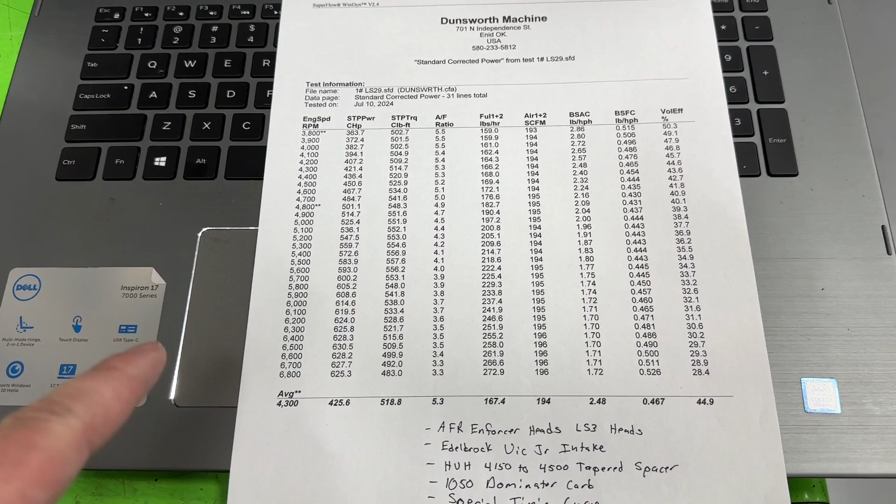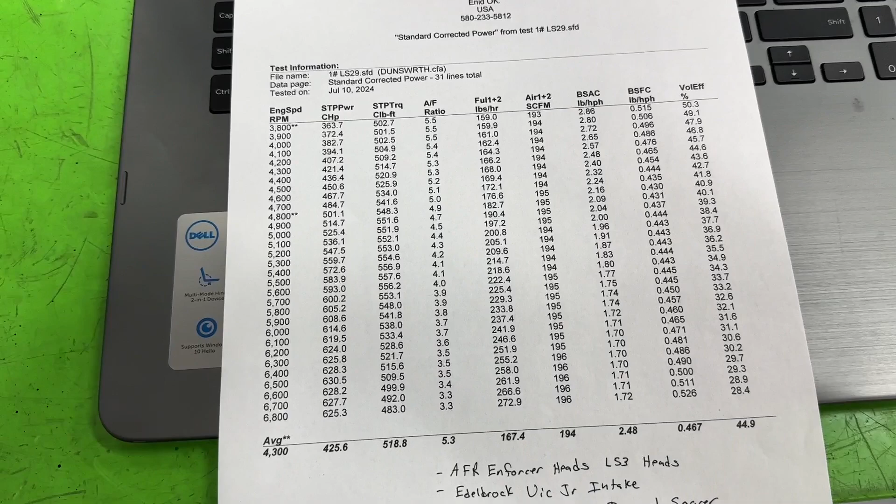All right, this is a dyno sheet from the LS engine, the dyno mule that just got done. And if you watched the previous video, it only made 570, so you might be saying, how in the world did you get to 627, right? What did you do to get there? Well, we'll talk about that later, what was changed on it. But this is still with the Enforcer head, so watch a future video and you can see how that power changed and what we did. But I only need these numbers really, and it kind of helps me out.

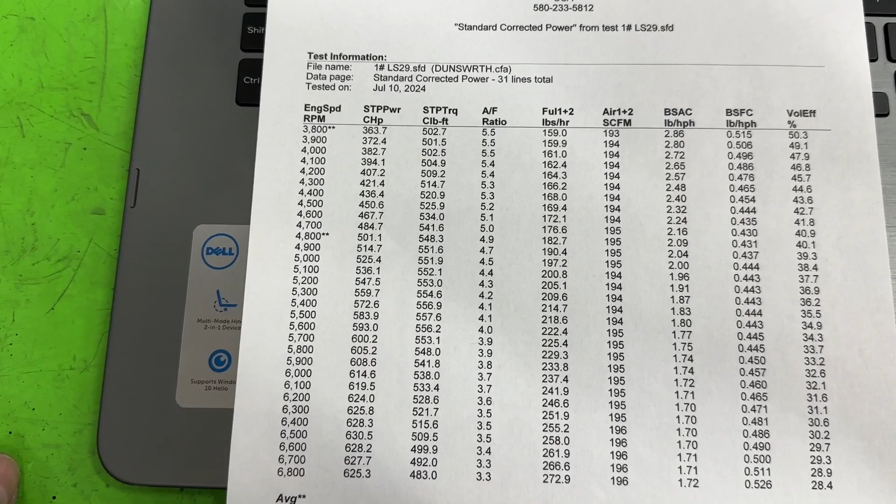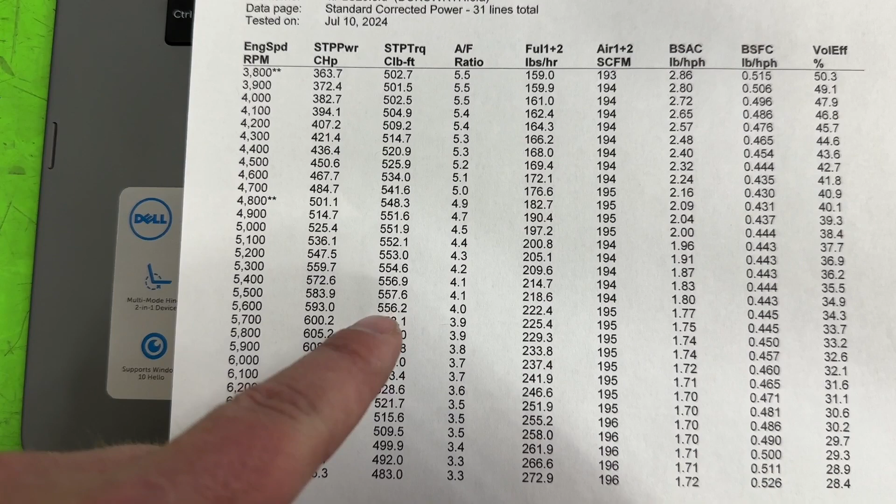So here's what I mean. When I'm looking on this sheet right here, what I'm trying to look at is where does peak torque occur? So forgetting the horsepower for right now, where's peak torque occurring? And if we look at my sheet here, this makes 557.6 foot-pounds of torque, and it's doing it at 5,500 RPM. So that's where it's most efficient, is at 5,500 RPM.

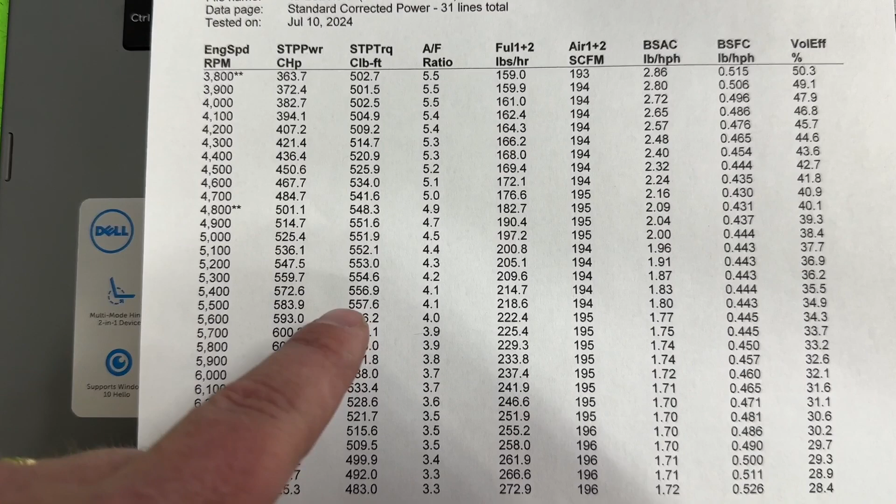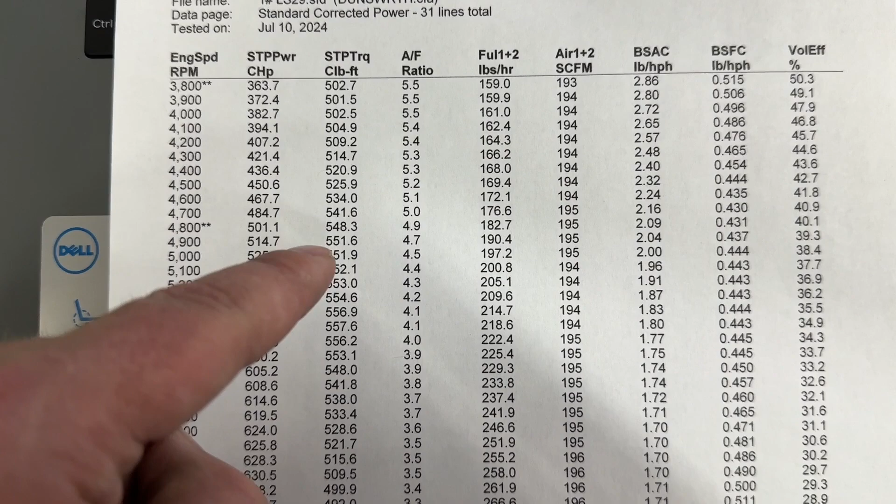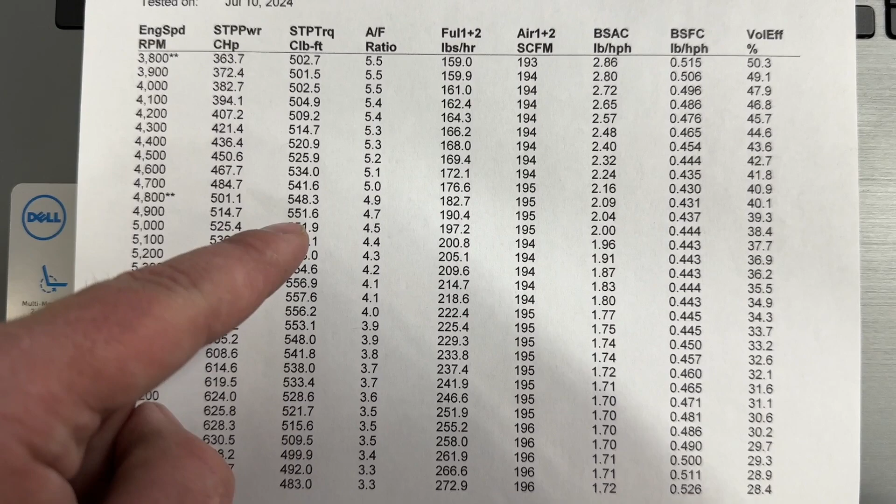But if you look, it's really efficient also at 54 because it's only 1 foot-pound down, and 52, 51, 52. So really, it doesn't really drop from 57 to 548 till there. So really, I'd say from 49 to about 57, it's really in its efficiency range. If I had the air head on here, you could see where the volumetric efficiency would show it too. It would show it's very efficient between, like I said, 4,900 and 5,700 RPM.

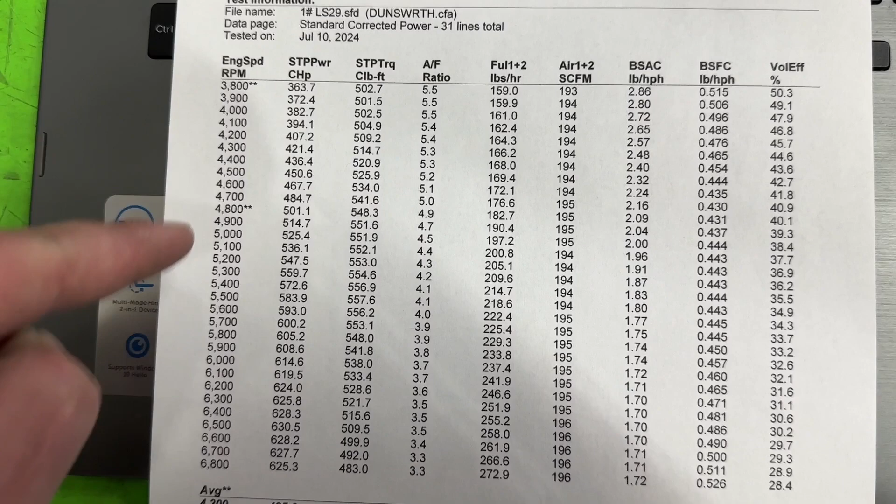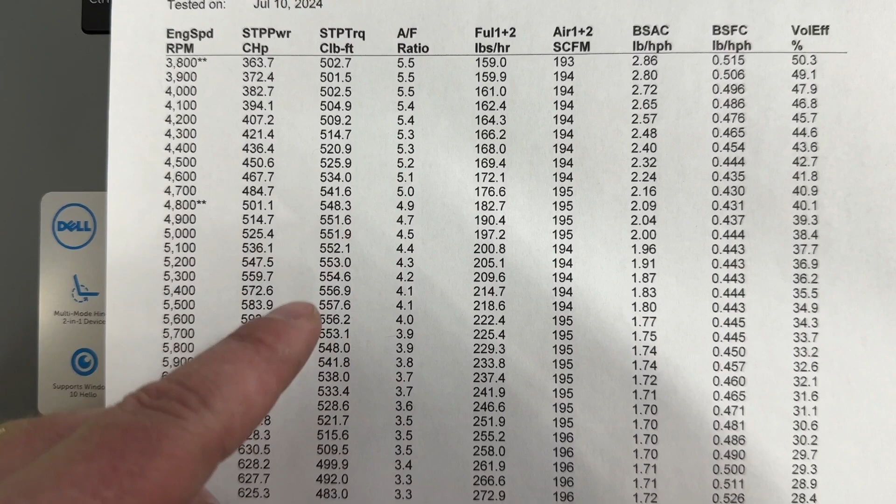So you're like, what do you mean? If you remember this pull right here that you're seeing, it had 29 degrees of timing through the entire curve. So when I started at 3,800, all the way to 6,800 RPM, 29 degrees. Here's what I did, and here's your trick. From this torque point here, so at 4,900 RPM, all the way to 5,700 RPM, I removed timing. I didn't add timing, I removed it.

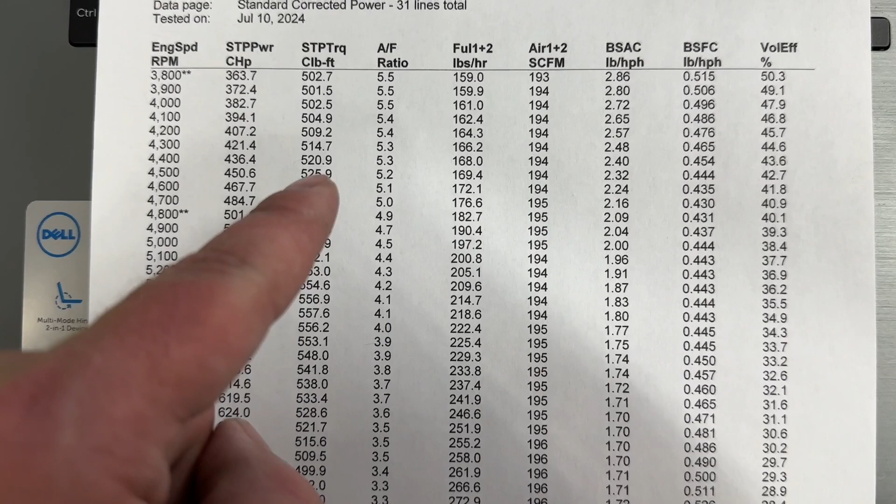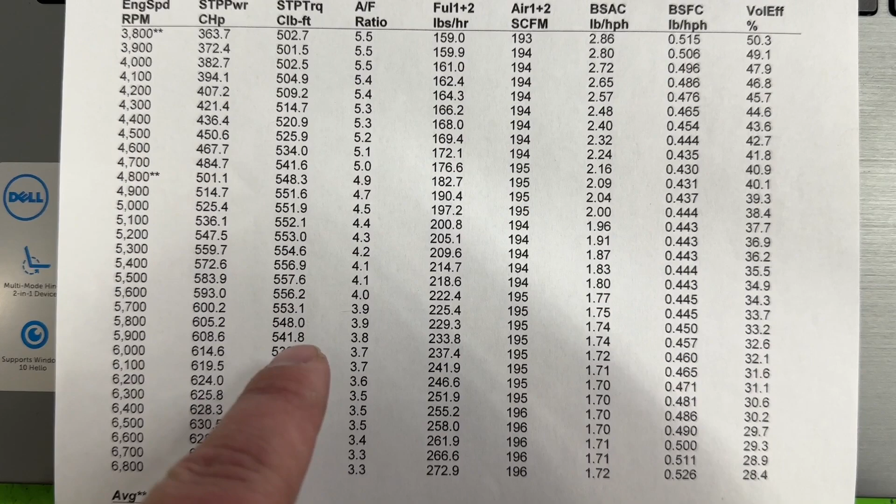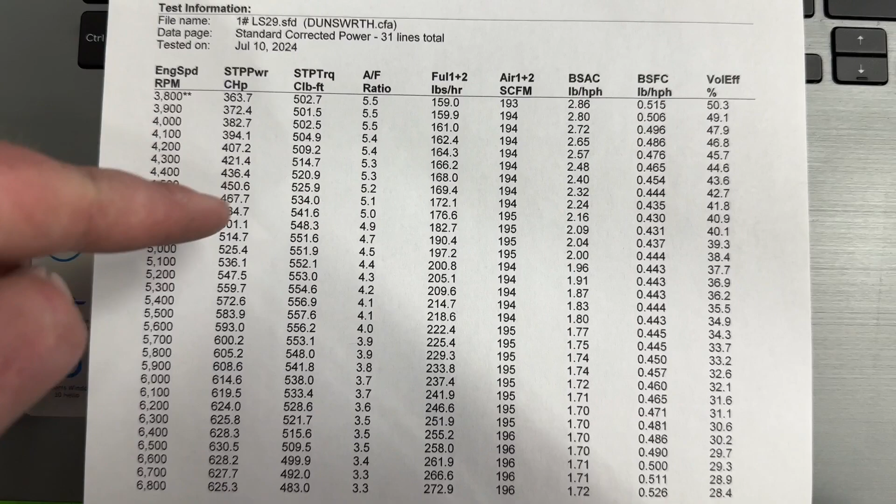So before it was 29 degrees, right at 4,800 RPM, I dropped out 2 degrees and dropped it down to 27 degrees. And then right at 5,800, I added 1 more back in and then 1 more at 5,900 RPM. So in other words, the timing curve went 29, 27, 27, 28, 29. Okay? So why did I remove that? Because it's the most efficient. It needed the least amount of timing. That right there gained 3 foot-pounds of torque doing just that.

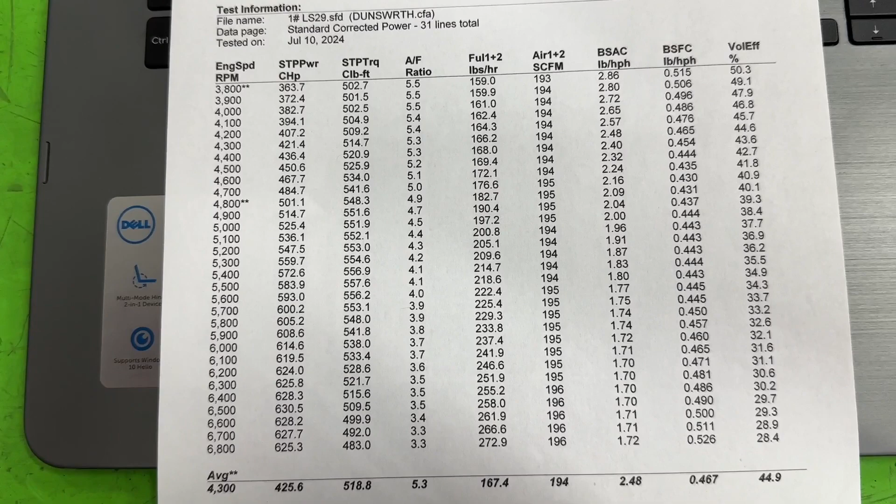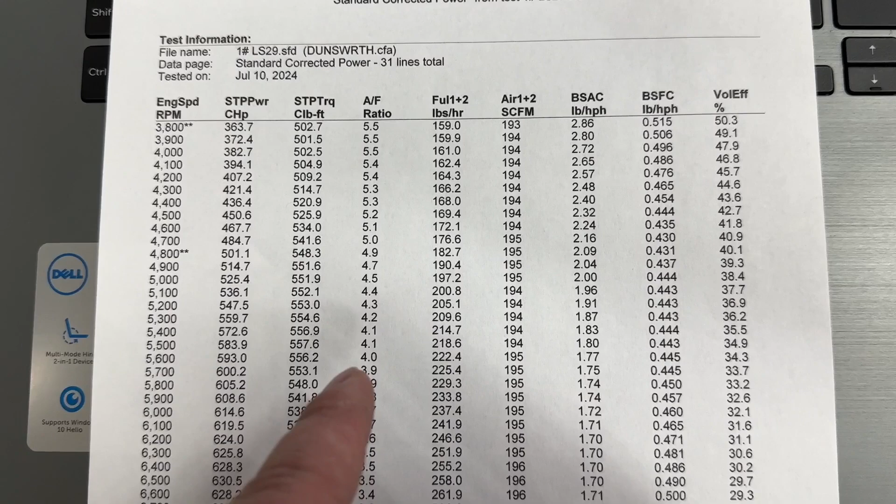So not only that, the gain in torque doesn't seem that much, and it really isn't. Peak torque really only gained 3 foot-pounds. But one thing you have to think of is it's also far easier on the engine. If you're running that straight timing, it looked like you only gained 3 foot-pounds of torque, but it was also easier on the engine having less timing on it, because it's not trying to fight against the timing during the stroke. So it's better on the engine and it made more torque.

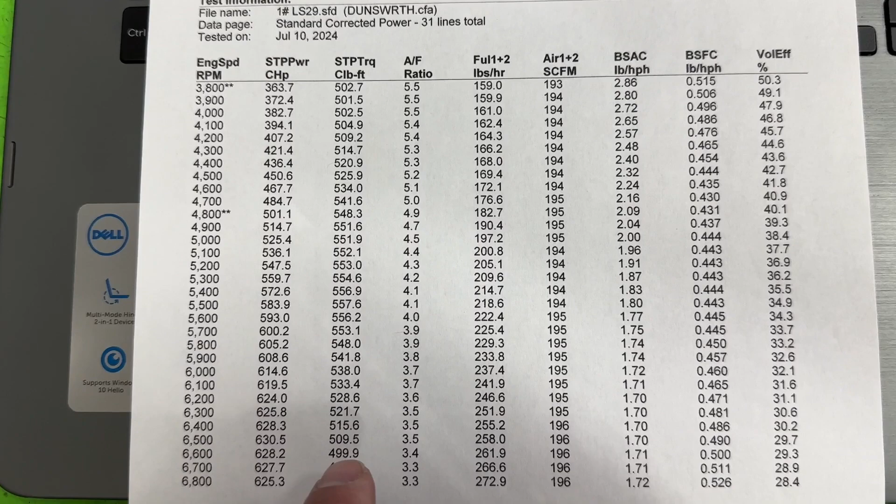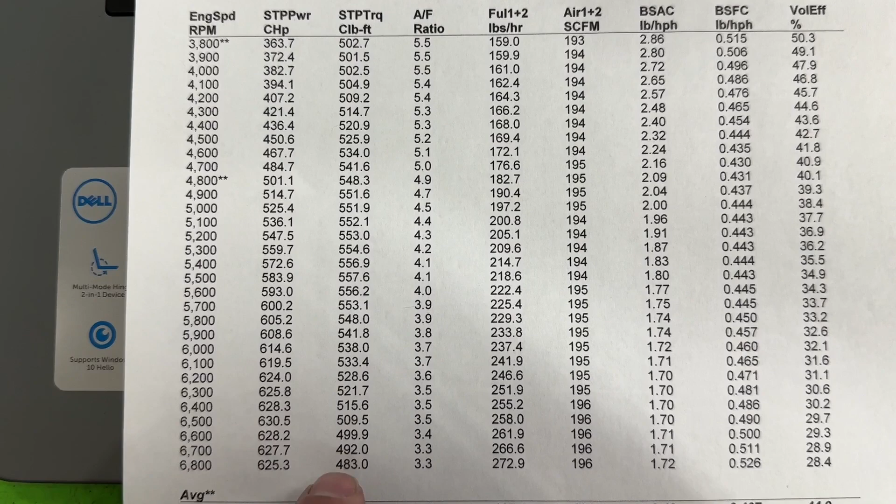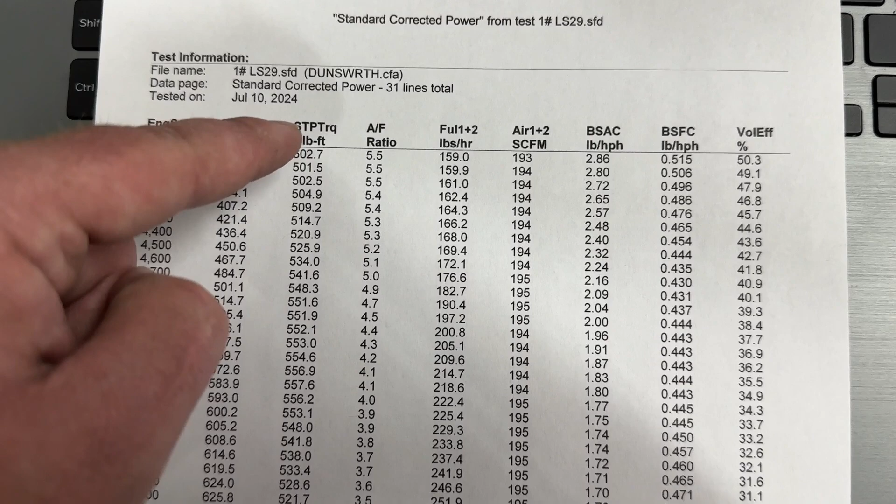The other thing I did, and this is where I get a little tricky: at 6,300, I know it's starting to get less efficient. Obviously the torque's really dropping, because look, 63, 521, it's dropping by 10s, right? So at 6,300 RPM, all the way to 68, I added 1 degree of timing. Instead of having just 29 from that point on, at 63 I jumped up to 30 and ran 30 all the way. So the timing curve will look 29, 27, 28, 29, 30, on. That itself gained 5 horsepower at peak because it wasn't very efficient there, and that helped it.

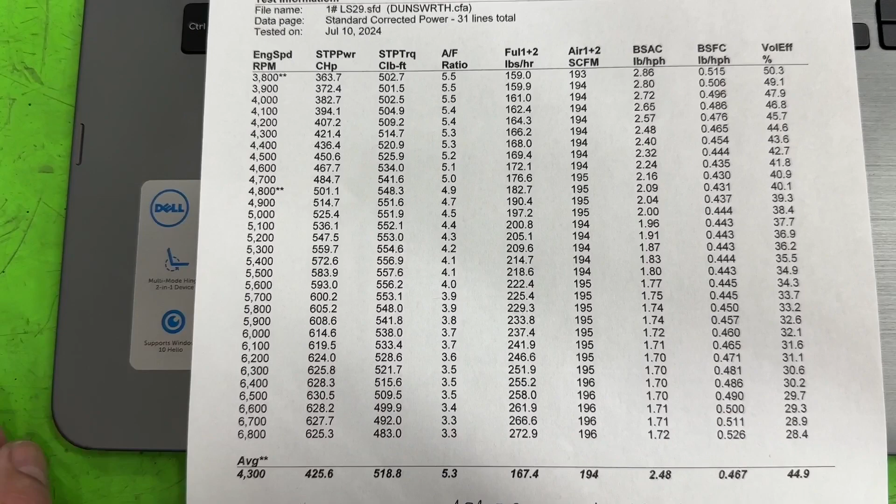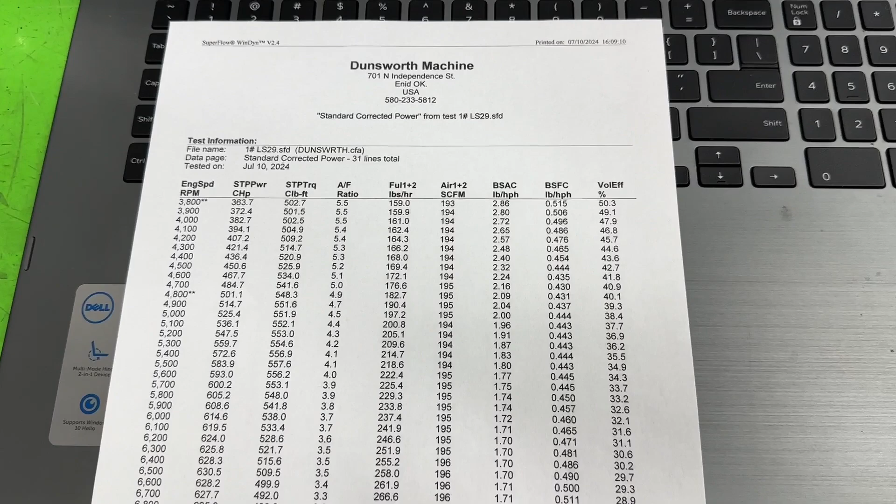So that sounds like, well, you're just talking. Can you show me what you're even talking about? Because you're losing me. So let me pull up this program real quick and show you a graph so you can get an idea. Okay, sorry about that, I had to use my hands. This is the timing curve that shows what I was describing. This is from the S10, so it's not quite the same, but I will show you the live action for what the LS one was doing.

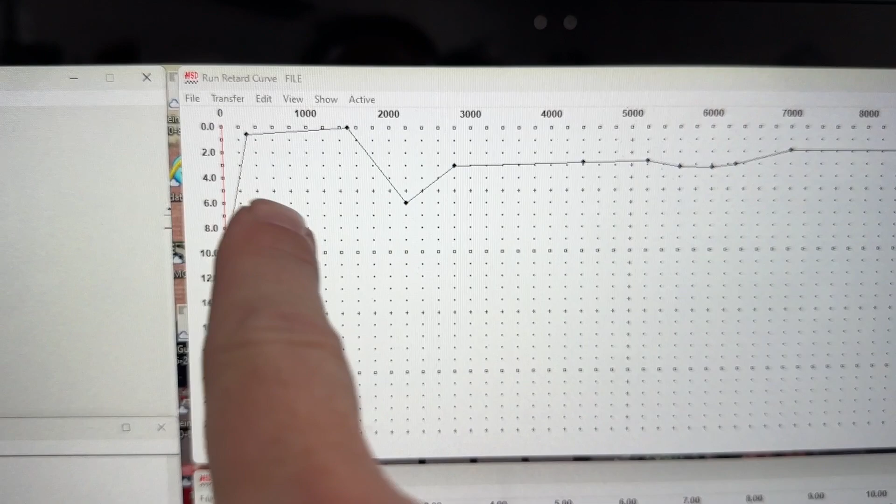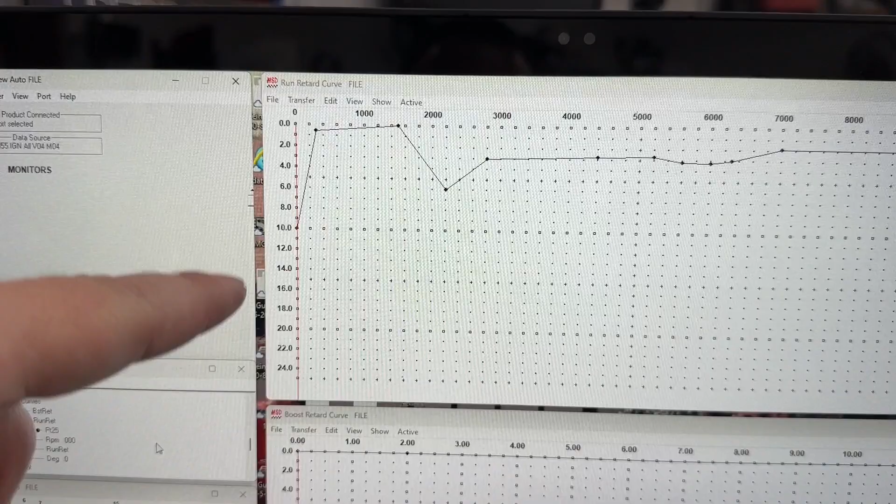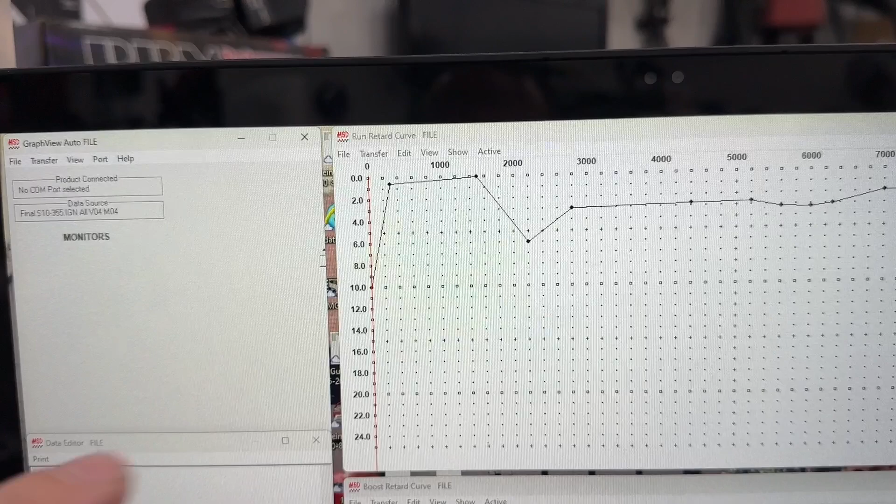Now, this is a little bit weird, because you're like, what did you do? First off, this is the 6AL2 programmable box, so it acts like a retard. So it sounds like you're only having 8 degrees of timing. No, that's actually you retarding 8 degrees or retarding 10 degrees. It's weird, because with the MSD 6LS, this would tell you your timing. If you said 30 degrees, it would just be 30 degrees, 29 degrees. If you're using this 6AL2 programmable box, you have to know some math and know that you're retarding out. So if you set your timing at 40 and you're retarding, say, 6 degrees, really you're at 34 degrees, not 40.

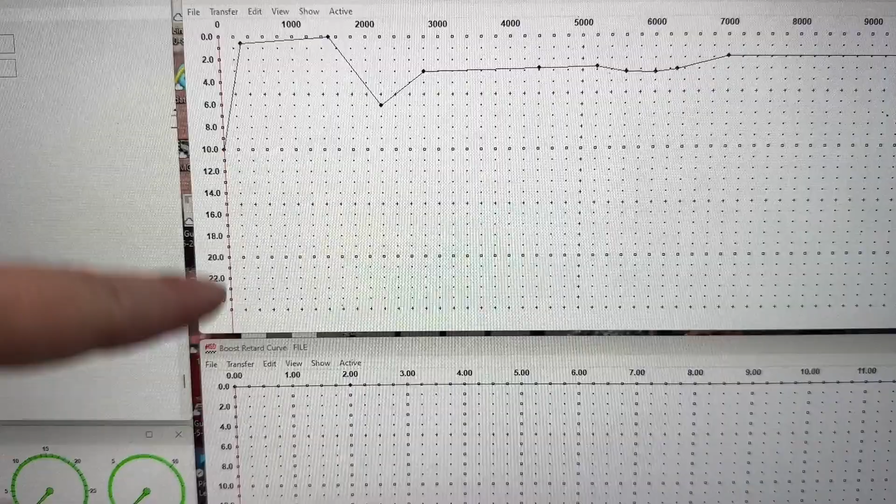But on an LS box, because it has the crank trigger and the cam sensor, it can tell you exactly what your timing is, so you just enter it in. Also, if you have the MSD Grid, it works the same way as the LS one where it just says the timing. You tell it, hey, this is 40 degrees, and it's 40 degrees, great. Instead of you doing the math, it'll just tell you the degrees, and that's what your timing is. I know I went through that kind of quick.

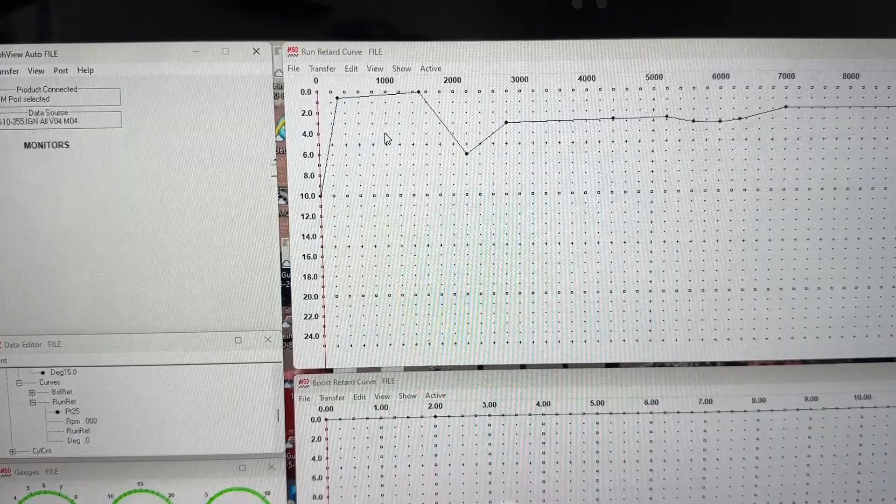This I didn't describe, but here's a little timing trick for you. This one's a little backwards the way I did it, but if you're targeting a specific RPM that you want your engine to idle at, say 1,000, right here, and you usually run 30 degrees at peak power, then at 1,000 RPM you might put the timing at 35 degrees. Remember, it's not efficient there anyway, but it will make the engine more efficient to have that much timing there. But below 1,000, you would ramp it up to like 40.

And you're like, why would you do that? Because if you want it to idle at 1,000 and the engine keeps trying to die because you've got a nasty cam, as the RPM drops, the timing goes up, which makes the engine speed up to get back to 1,000, where it drops the timing. So it keeps doing this. This is the reverse of what it should be. In other words, the line should have been sloped up this way.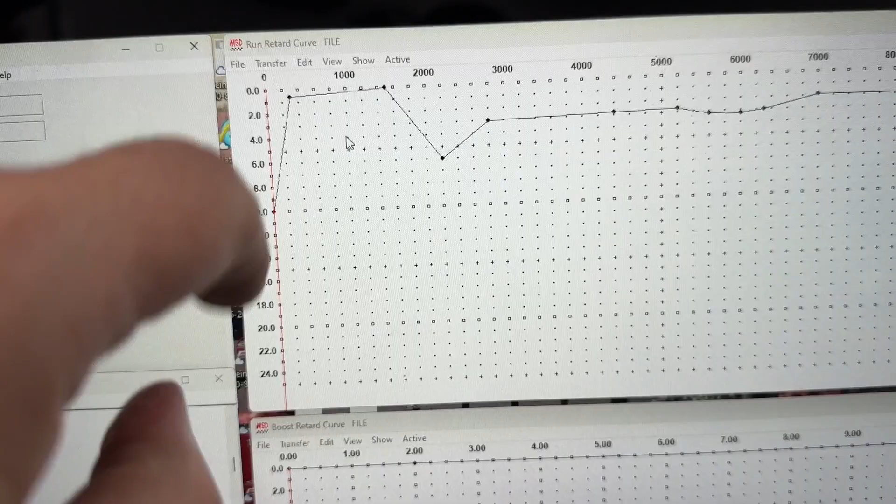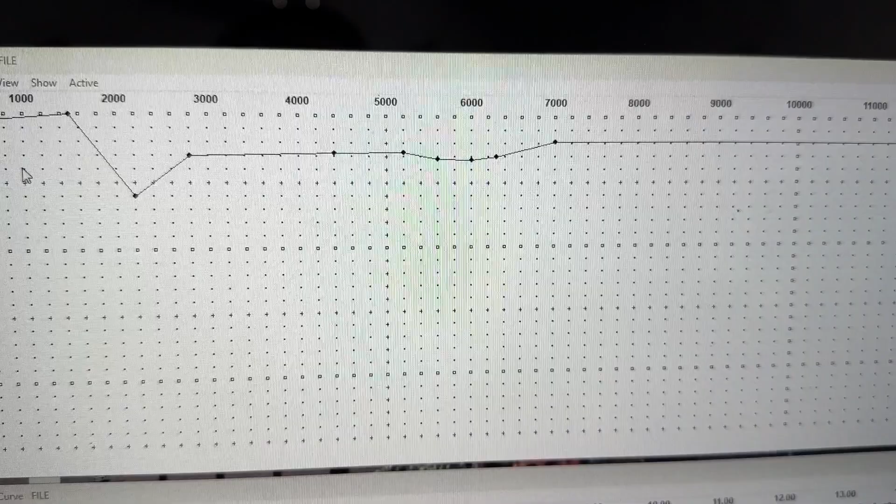You still want to take it out so you're not kicking against the starter for the first 200 RPMs. But back to what I was trying to show you. This is that curve for the torque. So the S10's engine is a little bit different, the 355, not the one that's in there now. Its curve was different. Its peak torque occurred at, I think it's 6,000.

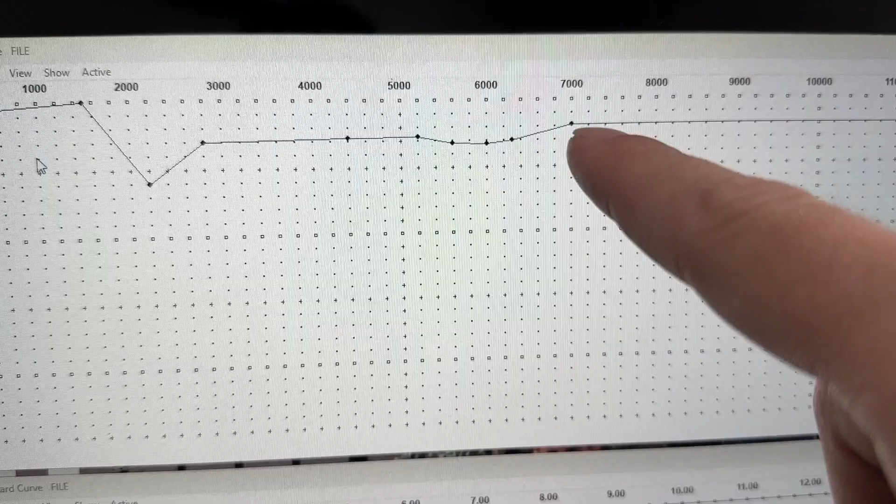So if you could tell, this is where it was the least efficient. So I removed timing, and that's why we have that curve. That actually brought the torque up, like I said, a few foot-pounds of torque. And I didn't do it here, but on the LS engine, peak power on this S10 occurs at 7,500. But at 7,000, I actually ramped in 1 more degree of timing and left it all the way.

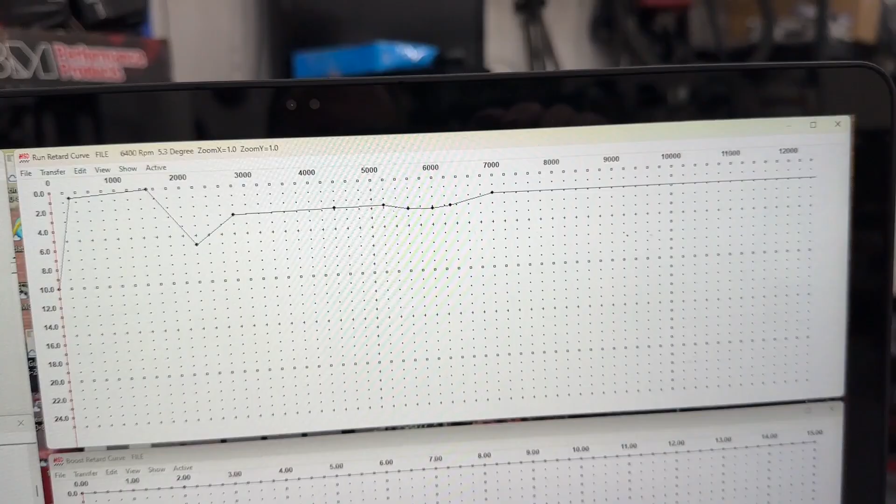So that's kind of how it looks. You could tell it's sloped up. So we're most efficient here, so I'm taking out timing, getting less efficient, so I add timing and then leave it in. You can play with this on the dyno and take some time, but you're like, I don't understand any of this still. I don't get it.

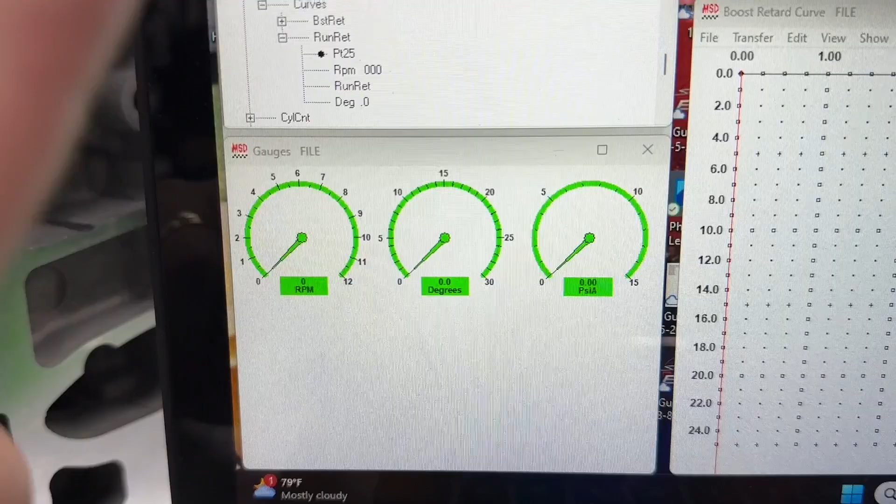See this right here? If the engine was hooked up and running right now, you would see these gauges and see what this is. Lucky for you, I took a video of this to show you exactly what it is. I recorded this as we're making a dyno pull, and it'll tell you how many degrees of timing we have, and you can see what's happening.

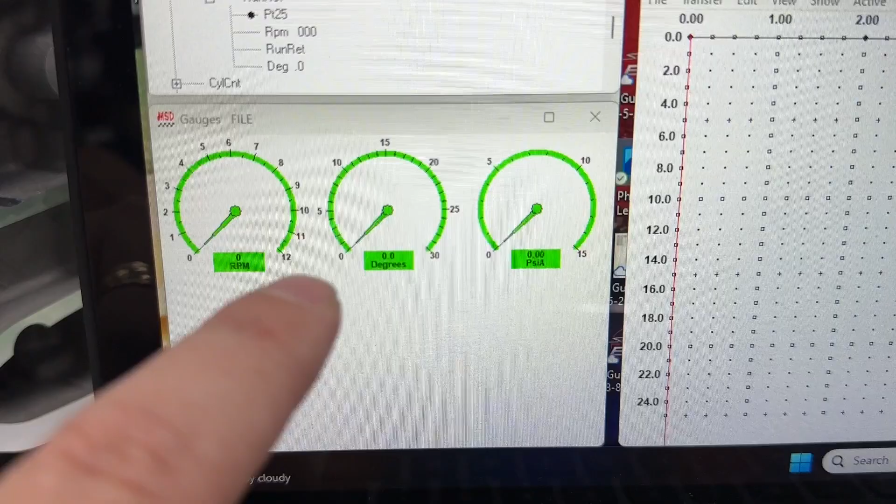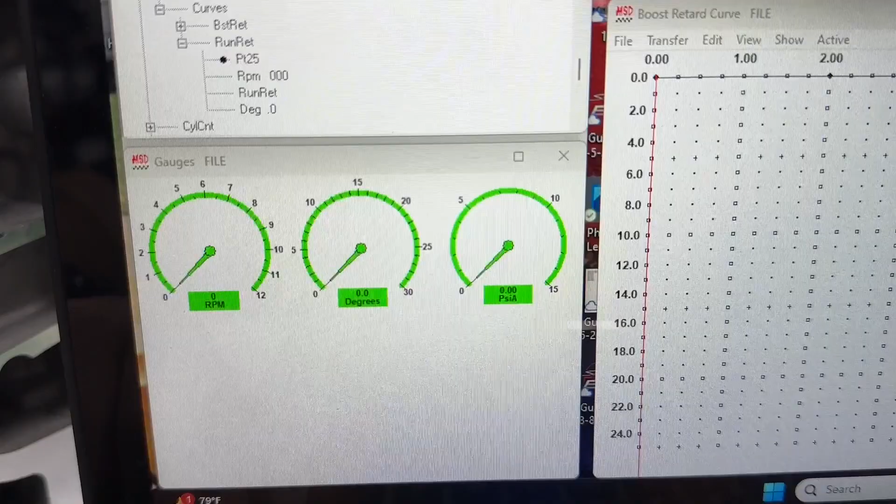By the way, I should point out, on the idle on the LS, I set it at like 18 degrees all the way to, I think, 2,000 RPM or something. So if you're like, you're at 18 degrees, you lied. No, I didn't really care about the idle. From idle to 2,000, I think I had it at 18 just to be easy on the starter. But once it got after it, you see it went right from 29, 27, 29, 30. You'll see it happen. Watch this. It does work. I'll show you a graph in some other video because I forgot to print it out.

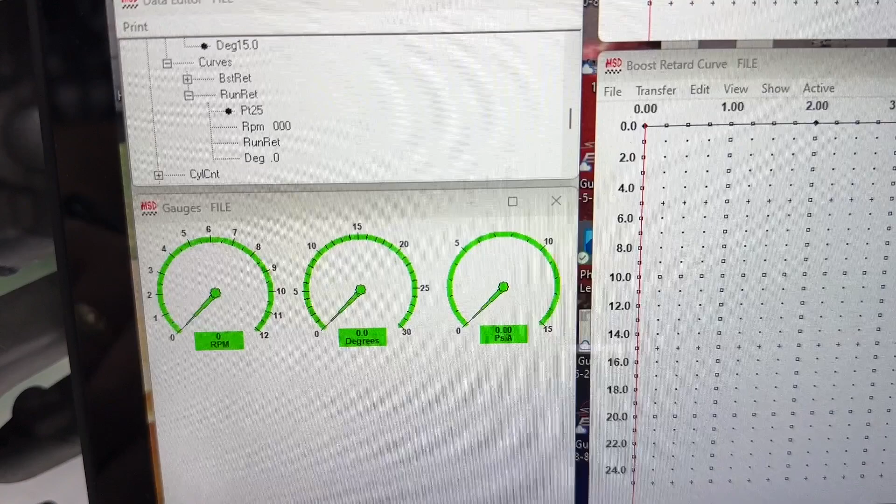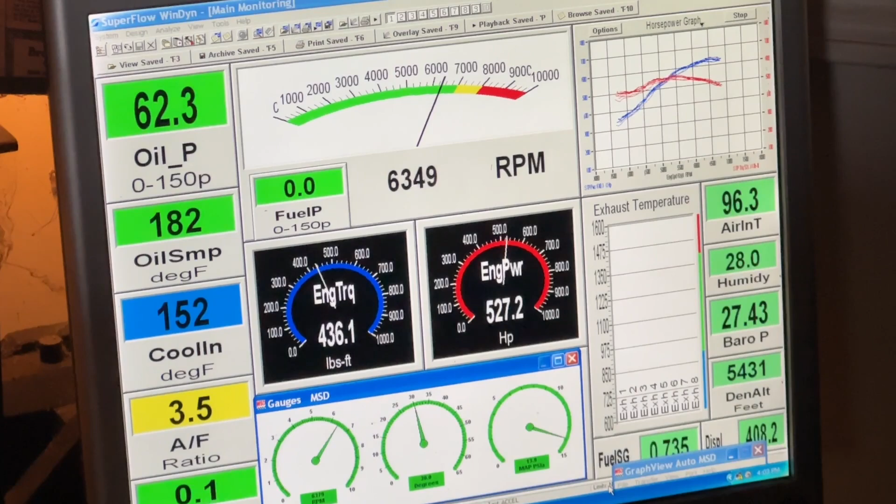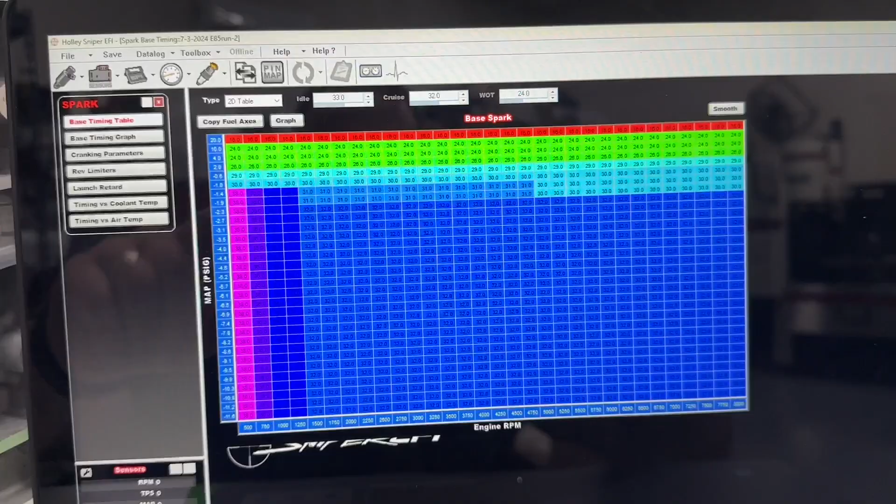But here, watch this. By the way, if you have the Holley Sniper software, such as I have here, this is also from the S10 currently. The numbers are all looking weird because they've got blue colors with them. I don't know how to get rid of that, but you could do the same thing.

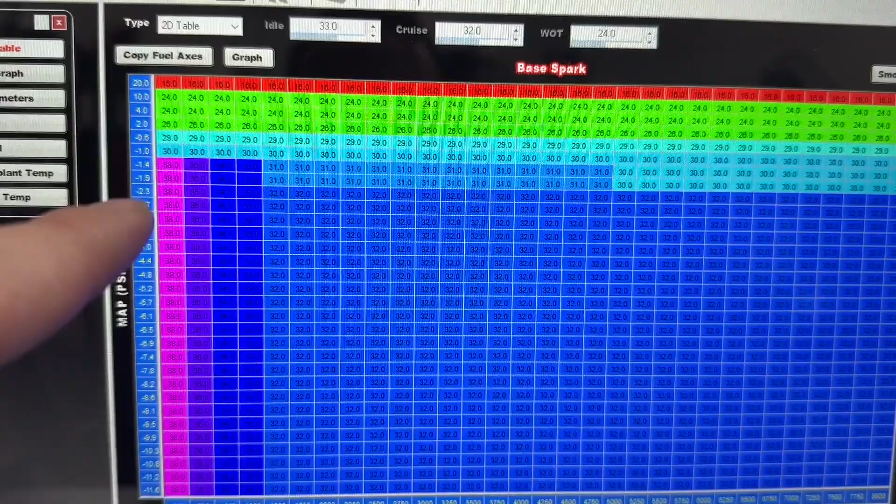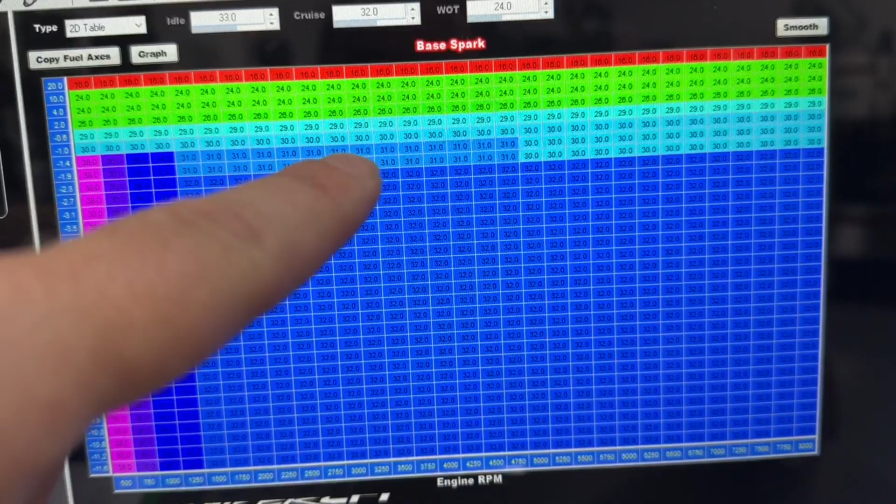Typically when you go wide open throttle, you're at half an inch negative to 1 inch negative. You can adjust this. I'm not necessarily in boost, but I'm being way more conservative because I've got a supercharger on this, so I'm not playing with it like I would with NA. But you could do the same thing here in your graph. You'd simply take out the timing at peak torque and keep it on.

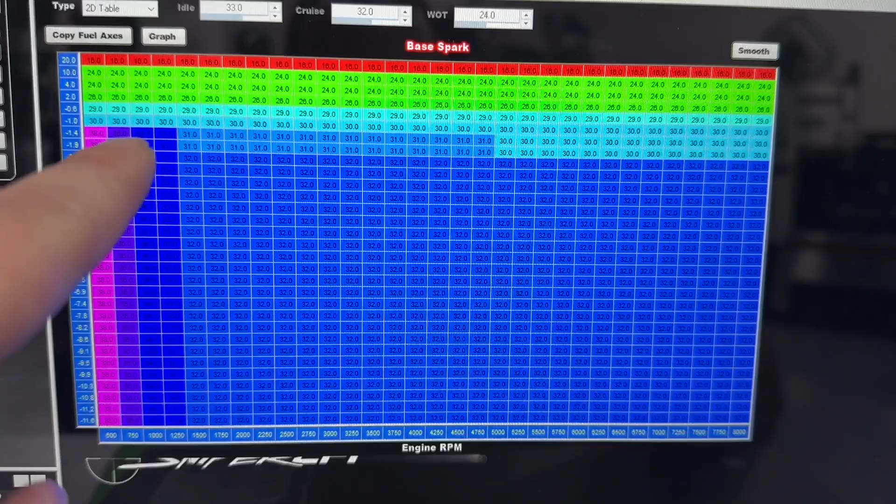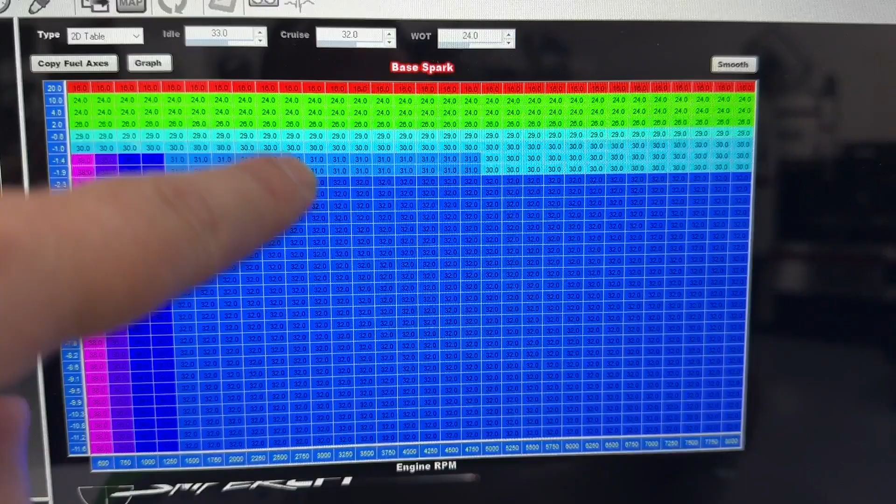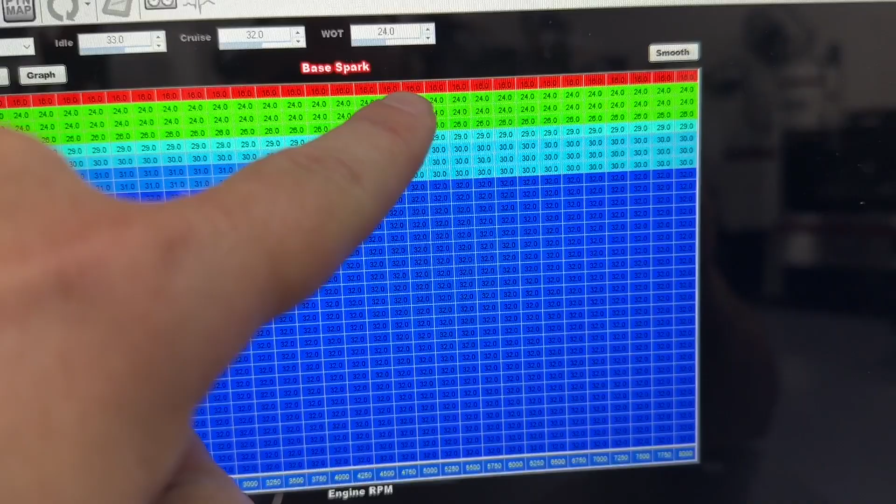You might say, why don't you do it with boost? You probably should, because the engine doesn't change its peak efficiency under boost. Where it was most efficient NA is still where it's most efficient with boost. The boost just hides it because it's a combination thing. Where the blower is most efficient is where the peak torque then occurs, not where the engine was. The engine is still under the most stress at peak torque, so you would still remove timing there, especially with boost.

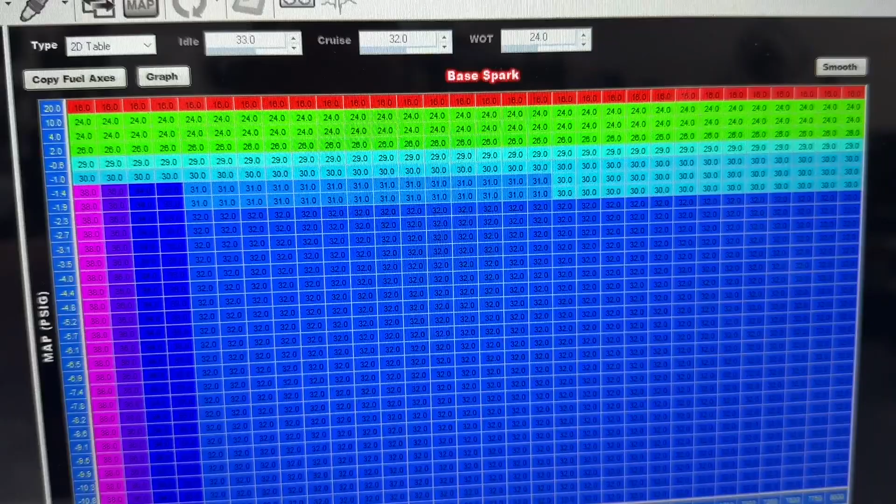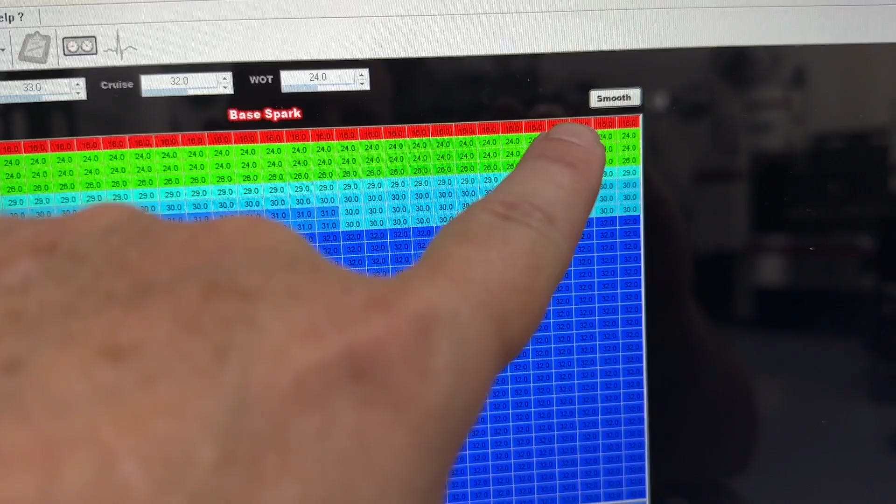I have so little anyway. If you look, I'm at 32 degrees. If we dyno this engine NA, the 406 that's in the S10 right now, it probably went 35. So I'm way under it anyway, just because I'm trying to be conservative. You can kind of tell what I've done here. This is a really conservative one. I think this is the first pull, not the last pull, in case you watch those chassis dyno videos.

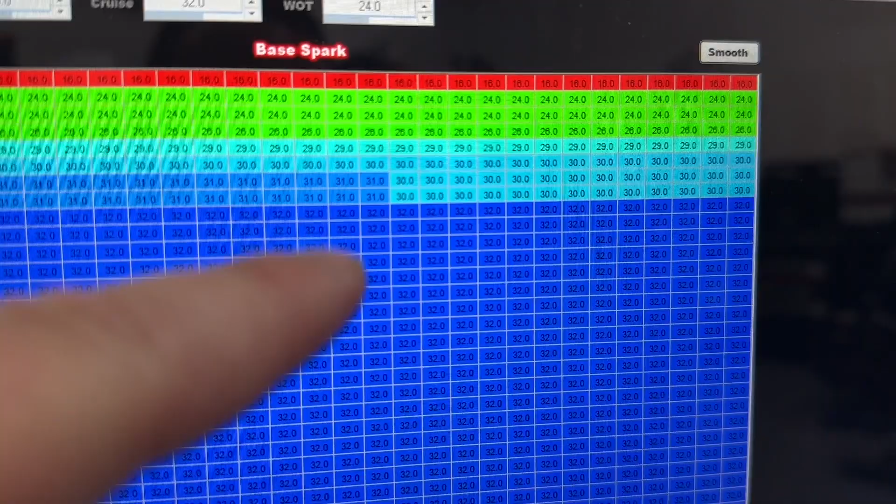I know it is, because this was like really, really soft. Yeah, that's super soft and not even correct. That's not what I ran the last one. But anyway, there you go. Now on to the other stuff.

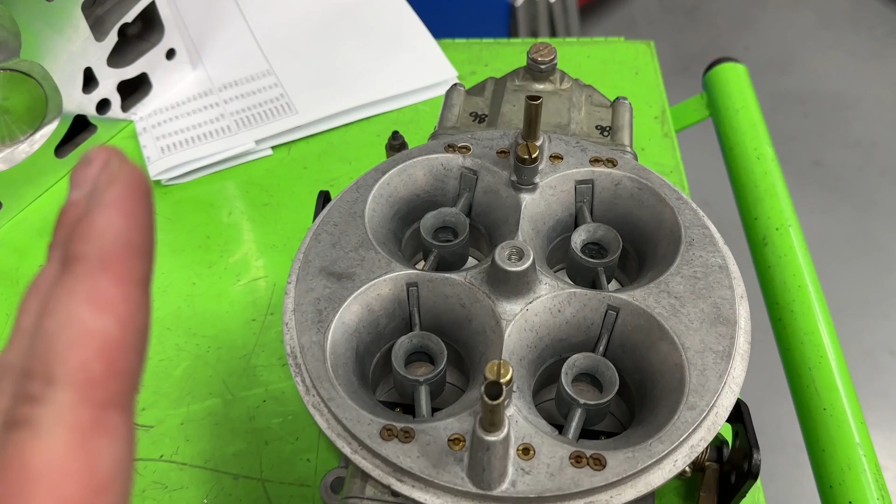Now to the little Dominator thing. If you remember right, and I don't have the spacer here because Dunsworth used it so we could do some testing, I had said I've put a Dominator on everything, and that's like Frank's Red Hot sauce. You just put it on everything, it seems like it makes power. And people commented, rightly so, hey, you're putting it on these engines that make some serious beans, and that's the reason why it's actually making more power. If you put it on something that made less horsepower, say 450 horsepower, it probably wouldn't do as well.

Well, I asked Gary Dunsworth at Dunsworth Machine, hey, could you do me a favor? The next time you have a 450 horsepower engine or so run across the dyno, can you ask the customer if it's okay? And I'll leave you the spacer, and I got my Dominator there. Can you test and see what it would do? He said, sure, I'll give it a shot.

So what he did is he had the circle track engine, which are just very popular in most of the country. I think this is a factory stock engine. Don't quote me on that, it could be something else. But they have the spec heads that they have to run. They've got a flat tappet camshaft.

So for all those LS guys that think you can't make 450 horsepower in a small block Chevy, they're doing it with a flat tappet camshaft, cast iron heads too. And these are not all nice heads. And a cast iron intake, by the way. Well, actually, I think this was that Performer EPS, if I remember right. It's the 2101, so it's pretty much the base. Anyway, he put a Dominator on, and these are the results it got.

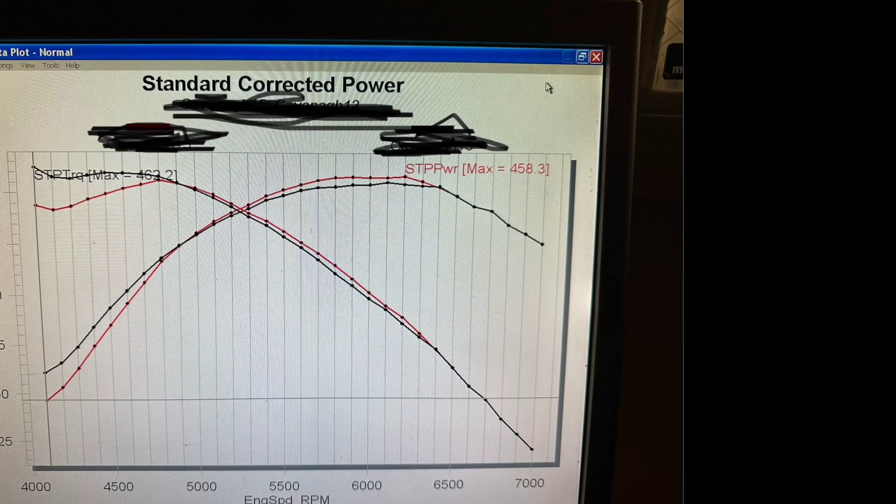So here are the dyno results. The 1050 Dominator did make more power, but it also lost a lot of torque down low. So on a 450 horsepower engine, a little 355, kind of interesting results.

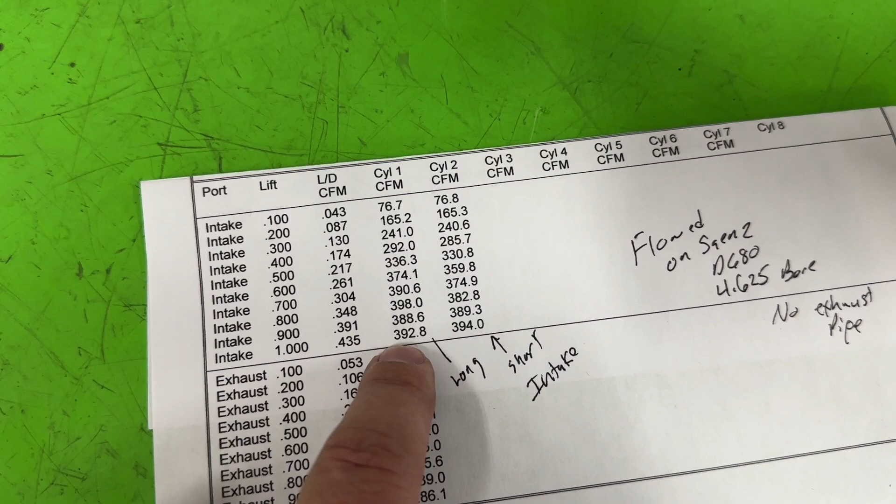But what do they flow? They flow this. Not bad. 398 at 700. 392 actually at 1 inch, but not bad. 394 on the short runner. Exhaust flowed 286. This is not bad for a 340 cc port.

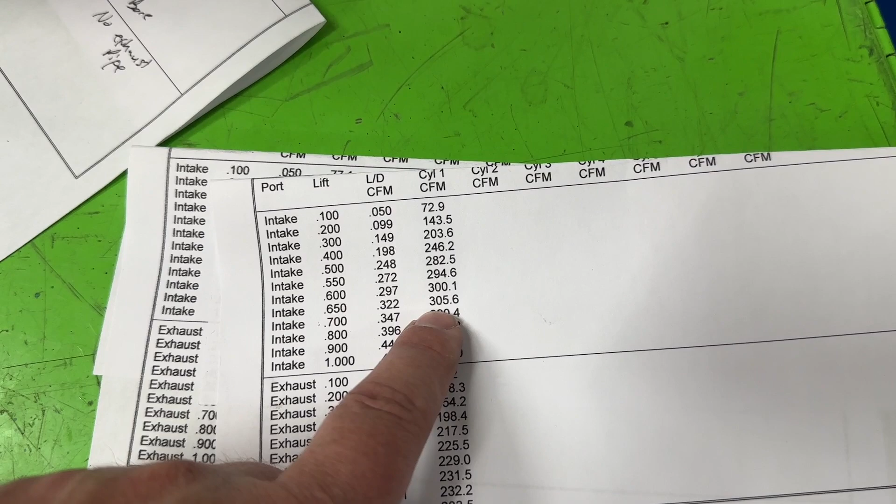But this is going to be dyno tested. What do they flow, you ask? Well, here's what they flowed. Now, I ported these. These are 202 valves, 1550 if I remember right on the exhaust valve. 246 at .400. It does 306 at .650. It actually peaks at 313 at 1 inch. But like, that doesn't matter. Exhaust goes 235, which is really good.

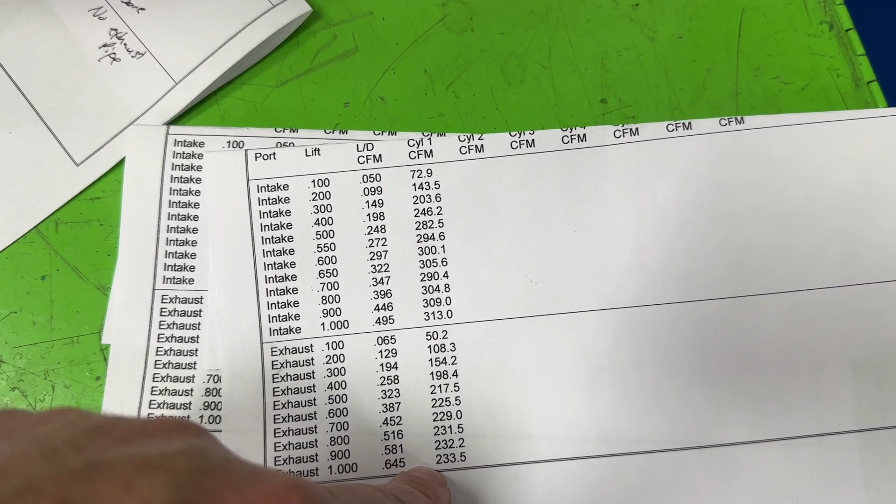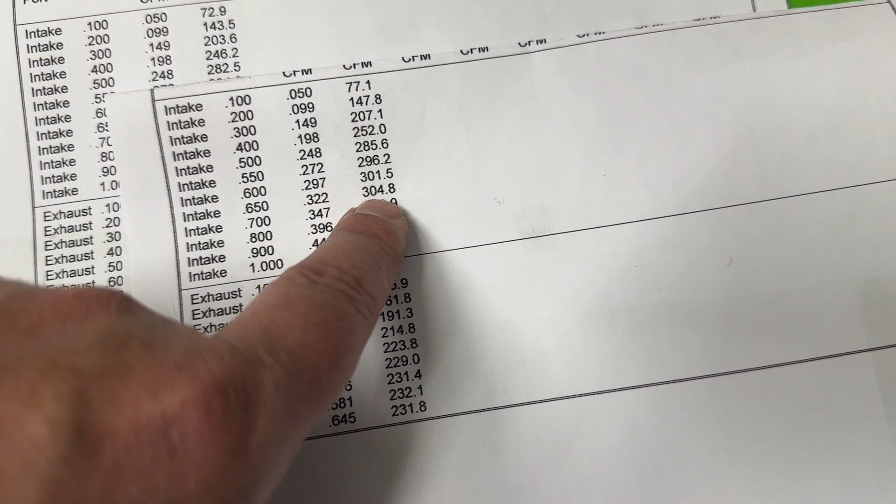And you're like, well, wait a minute. There are several people that got ones that flow way more than that. Oh, okay, then I did it on my Superflow bench too if I want to feel good about myself. On the Superflow, it goes 252 at .400, 305 at .650, 301 at .550, and 319. So if I want to feel good about myself, I'll put it on that bench. But regardless, these are my benches, and I trust their numbers.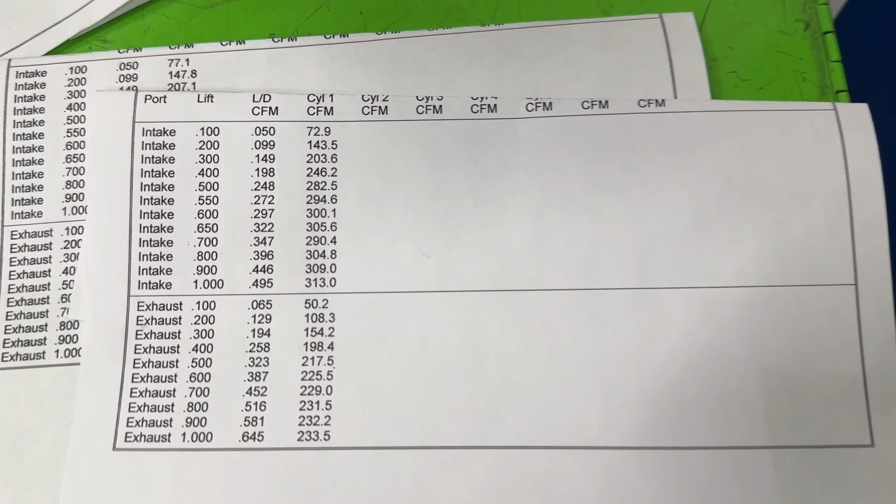This is not as good as the LS3 as far as flow, the stock flow. It's just not, even ported. No sense in lying about it. But much smaller valve at a 202. And I think this is 1550 if I remember right what I did on that. But anyway, much smaller valves. The chamber will be smaller too, which will boost up the compression ratio, which is an interesting thought.

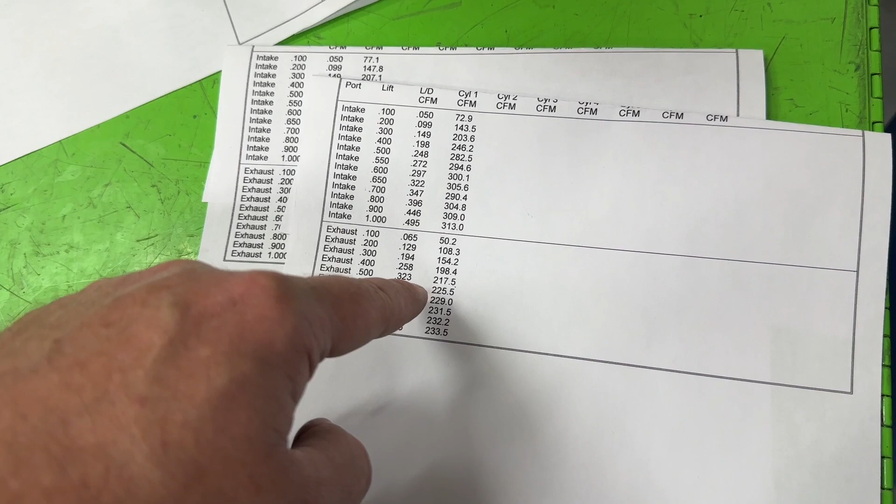These things probably flow about 10 CFM less than what the LS3 does. Maybe not at peak. The exhaust is really close, almost identical. Well, actually, I think these are better. But the one thing is I think these chambers are about 10 cc smaller. I'm going to CC them and find out. I've done tests before about compression gaining more than flow. These could actually make more power because of the compression. Be interesting. I'm only going to test one cam on them.

The other head I'm going to test is the small bore LS3 heads. I'm going to try to put those on right after. So I'm going to dyno test these, take it off, put on the ProMax small bore LS3 heads, and dyno test that one. And I'll probably wrap up the testing for that day. Anyway, that's hopefully coming up. This wraps up any technical part of this video.

So after this, it's just me rambling about my son and his swimming, because the reason why I've been busy is because he's had a club state swim meet, the state one, the big one for the long course. And that's been Friday, today, and tomorrow.

So I'm fixing to go to bed after I get done with this video, because I got to get up at the crack of dawn so he can do it again for the next 3 events. So I'm going to talk about that, but as far as technical stuff, that wraps up that. Anyway, so don't complain if you hear me talking about my son right now.

All right, here's where the swim dad part comes out. If you have a kid that's in athletics, you know this is probably one of the harder things you go through. Because I think, especially when I'm thinking about my son here, I don't think he knows that when he struggles, we struggle. Because we're trying to do whatever we can to help them. And sometimes we just don't have an answer. We don't know why things don't work out. Or sometimes why they did work out when it shouldn't have.